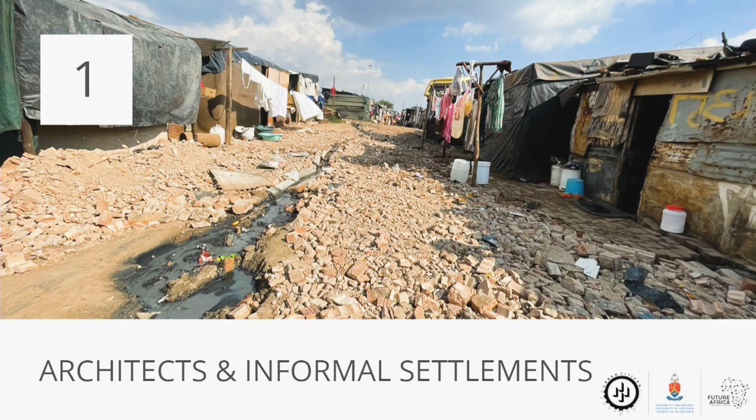Showing you what we've done, but I think it's really important for us to talk about how do we engage, how do we translate the work that we're doing as architects into tangible outcomes that could really lead to improved well-being for the inhabitants of the community. And I think that's really important for us because most of our work manifests in the built environment, but it's also something that's quite difficult to really implement in the end.

To contextualize it, I think we need to also state our approach or the way we see informal settlements, really.

I think for many, informal settlements are seen as a transitionary phase where we will move into a formal context, so we will one day develop our cities into being formalized altogether. But I think that's in many ways quite conflicting in terms of what we see currently.

We are very much aware of the high levels of informality. And ironically, this whole notion of the modern city, which is highly regulated and controlled and organized, both drives this informality, but then at the same time ignores it and says, well, by the way, you're not part of the formal process. We will not deal with this at all.

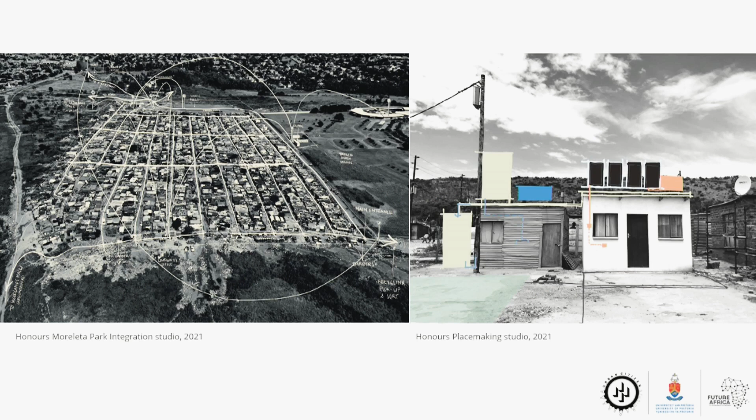I think it reminds us often of the fact that we are going to sit with this condition for a number of years and possibly forever, which means as professionals in the built environment, we need to start thinking about how do we actually engage with this and how do we actually work within these communities.

So at the Department of Architecture, but under the Unit for Urban Citizenship, we've actually been working in Melusi, Cemetery View, and Plastic View, and we'll be sharing some of our work here. And I will start with the work in Melusi.

I think we all know where they are. It's in Pretoria West. It's a rather new community. And we've had 2 studios there already: the Climate Change Adaptation Studio from 2020, and then the Placemaking and Placekeeping Studio this year.

I think to contextualize that, we've got a larger research project that looks at the interaction between the built environment and the users as a means of understanding the interaction between public health and the built environment.

And that's not necessarily new, but working in informal settlements is, I think, really important because for a long time that's really been ignored. In order for us to do that work, we're collaborating with the Department of Public Health and Chemical Engineering to understand both the built environment, but also ways to monitor certain indicators in the process. For the project, we are focusing specifically on heat stress and water insecurity.

And from that, we hope to develop a community resilience plan. So the thinking is that we will understand ultimately the exogenic and endogenic vulnerabilities of the users within Melusi, and importantly, the ground level conditions that they're experiencing.

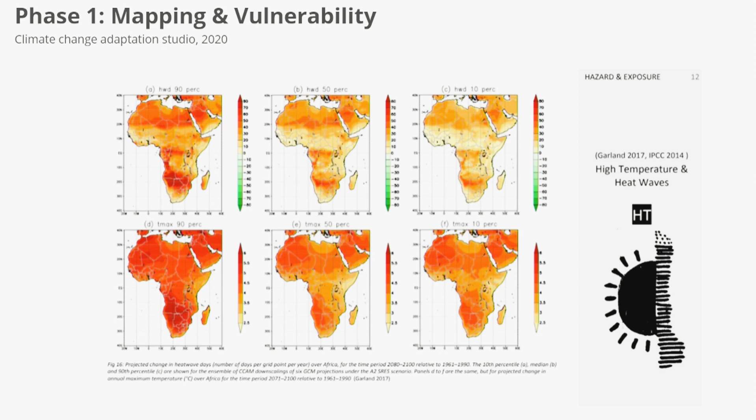In the first phase that we undertook in 2020, we looked at the vulnerabilities in Melusi, and we started translating that from what is available for South Africa and for Tshwane. So there's a lot of information available on the larger vulnerabilities, but what does it really mean when you're moving into a community itself? So we translated that into specific exposures that we are dealing with.

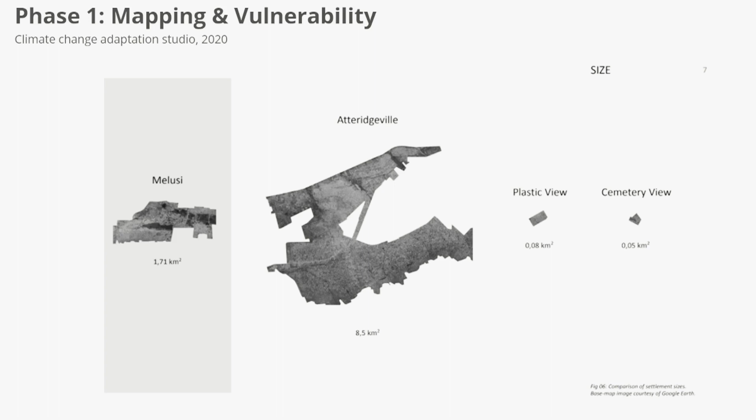Ultimately we've come to realize, I think we all know that, and we repeated it again, that informal settlements are very different. So again, when you start looking at a comparison between Melusi and Plastic View and Cemetery View, for instance, we start seeing that the conditions are different, and resultantly the exposures and vulnerabilities should also be different in the end. For instance, Melusi has a much lower density, which I think translates into a very different quality of life.

In the end, for the work, we started looking at the range of exposures, the range of sensitivities, and larger hazards, and identified infrastructure deficit, exposure to water insecurity, higher temperatures, and ultimately extreme weather events as being important factors to consider.

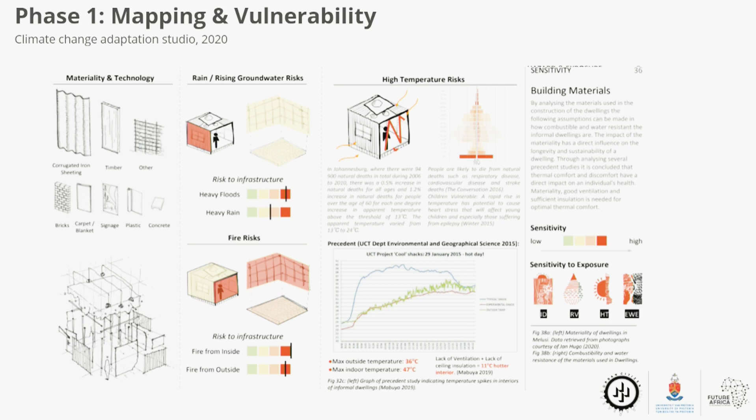But we didn't want to stop there. We wanted to translate it back into what it means in the built environment. So how does that translate into the typical house that you see in the end, and ultimately bringing that to the point where we say, what does it mean for the users?

Now, what you see here is a number of images that we started developing. And because we couldn't get access to the informal settlements in 2020 because of the lockdown, we used a process called cognitive dissociation, where we started asking the students to imagine what it would be if you're exposed to these different risks and hazards.

So identifying users, creating a story, and ultimately also looking for ways that you can create solutions that would actually be local and contextual within the context. So looking at a way to really understand the user in the end.

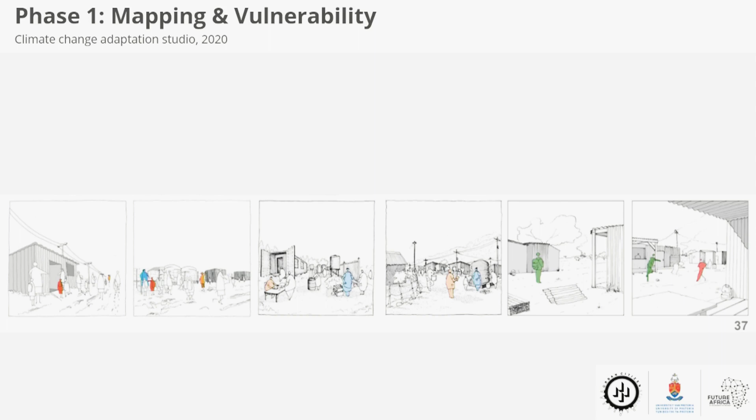In 2021, this year, we've been able to go to the site, which was actually really nice. So we used the ukuDoba method that's been developed by UP and Chalmers University as a means for us to start documenting small-scale GIS-based data, but also spaces that are generally not documented.

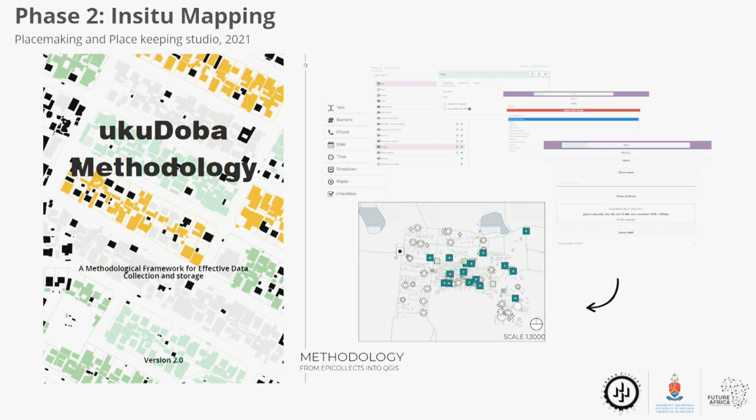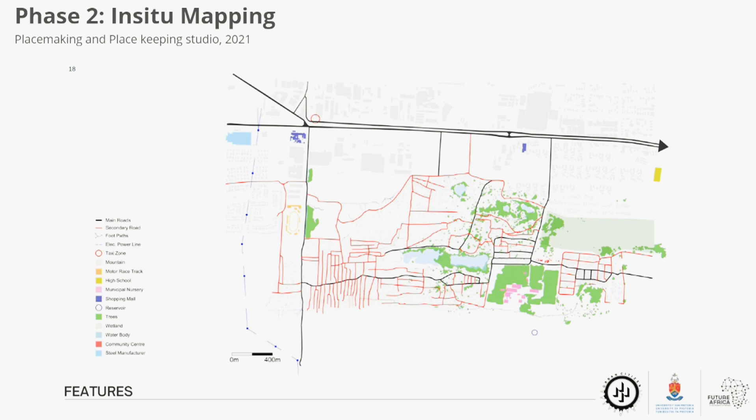And I think informal settlements are really one of those. So we started with OpenStreetMaps, using it as an open source platform where you can start documenting the informal settlement itself. So that's, I think, a good start already. And there, the geography department helped us a lot with a lot of the documentation.

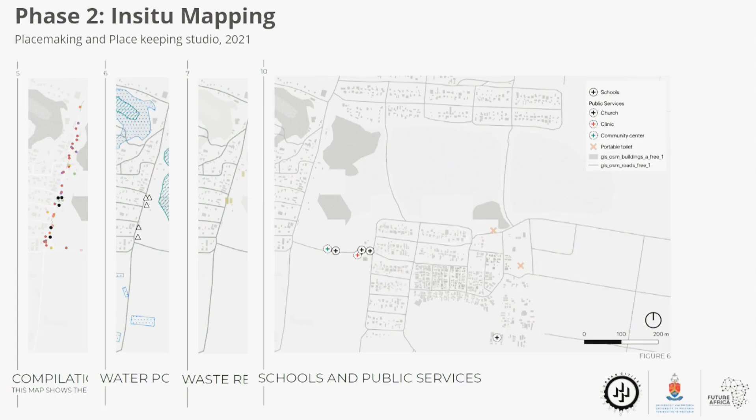But we didn't stop there. We moved on towards what happens in situ on ground level. So using geotagging, and as Marion noted, all the different resources that we've been able to document on site, the different important resource nodes, houses that have resources or not, waste that's accumulated in certain areas, and ultimately important services to the community and important businesses and so forth.

Now, the intention was here to start understanding the context itself and also understand the shared spaces in the process. Now, because we're architects, we don't like to stop there. I think that's really important, is looking for ways that we can start talking about the spatiality, the nature of the public space that is shared by the community.

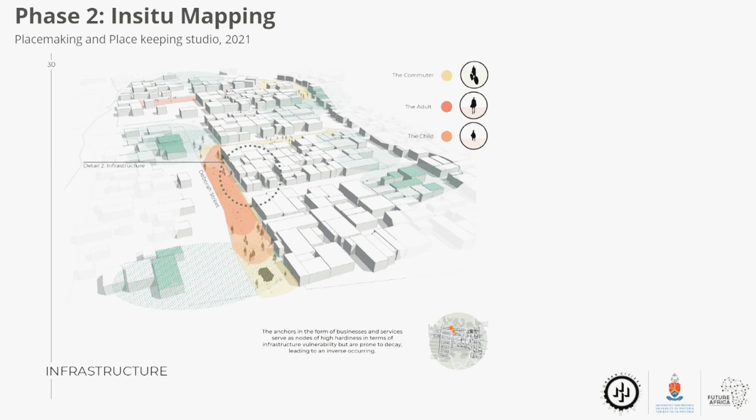And I think this is important in informal settlements because that's often not really available for anybody, which really is, and where I think you can make a massive impact in the end. So translating that to the lived experiences in the end and where that is located in the process. From there, we've started developing solutions.

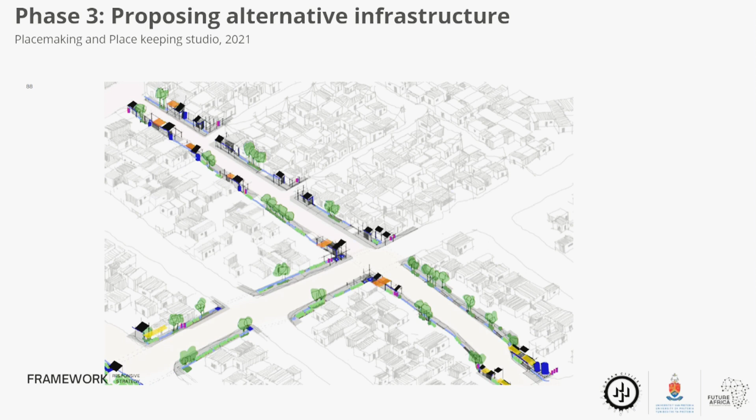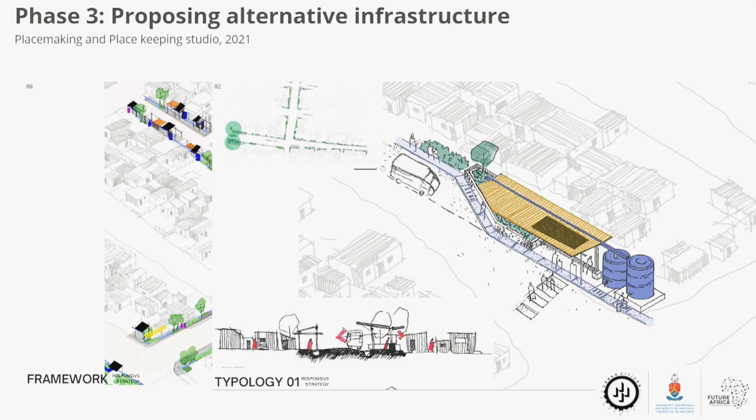Identifying the infrastructure needs that's needed. I think this is really often a response to the nature of the infrastructure upgrades that we often see, arguing that there are ways that we can actually improve well-being in the process. So identifying that it can be linked with the larger network of the community, and how the ways of service provision can ultimately also provide public goods in a sense. It can provide public space where we can engage, space where we'd like to spend time, rather than seeing it as a trajectory towards slow incremental growth of the informal settlement.

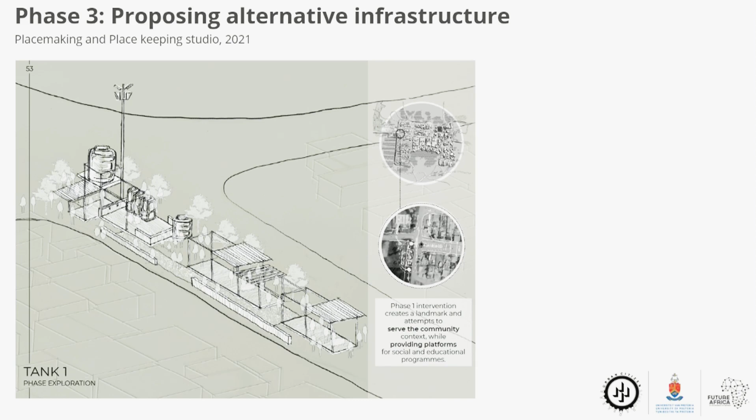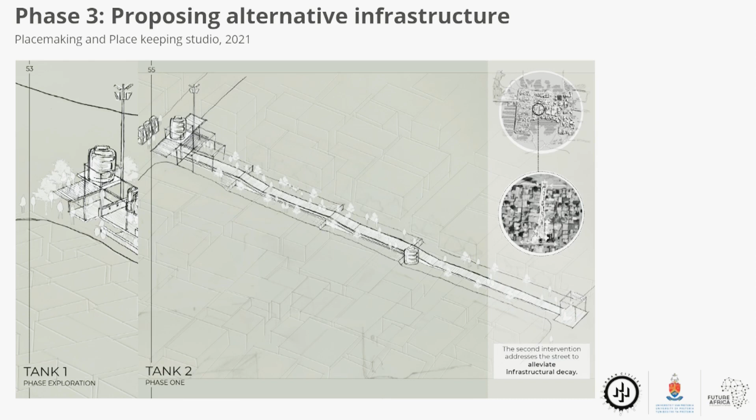And that has really translated into a number of proposals by the students, which address both the specifics of points within the site, but also starting to talk about how do we change streets as a whole. Can we do that? How do we do that? I think this is really our question ultimately - how do we translate these ideas into tangible outcomes in the process? There's a lot of ideas around what it can mean for the community, but how do we actually make it tangible?

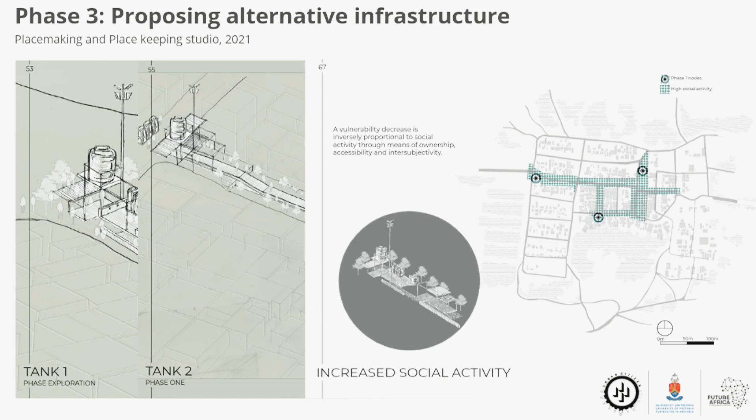For the project itself, the larger research project started by simply understanding the context we're working in, but now we're at the point where we'd like to understand the endogenic and exogenic risks that people are now exposed to, which meant we started the middle of this year collecting a number of water samples, developing sensors where we can start documenting the indoor environment, temperature, pollution, light qualities, and so forth.

This meant we observed a series of selected houses, but also developed infrastructure. That's my colleague Paul, who's developed a number of sensors that we can actually install in informal settlements or in houses without electricity, which is quite tricky. In the process, the students have been part of developing the sensors, installing the sensors, and documenting the information.

I think this is a great opportunity for them to also work within informal settlements, working from it both as architects working with space, but also from an academic scientific point of view, understanding the empirical data that we're collecting in the process. So this is where we're at, and hopefully over the next 2 years we'll be able to collect sufficient data for the work that will continue from there.

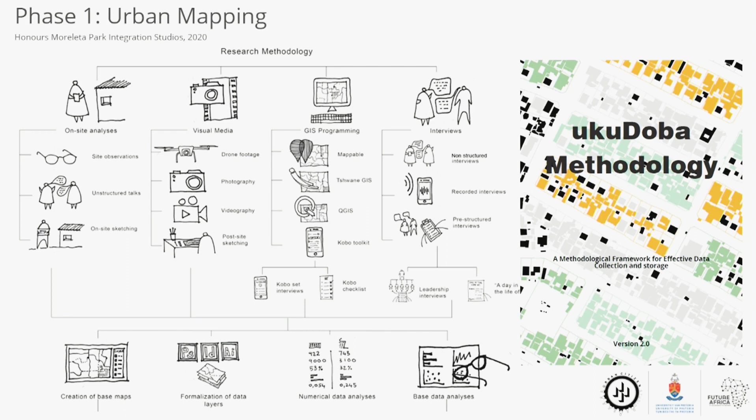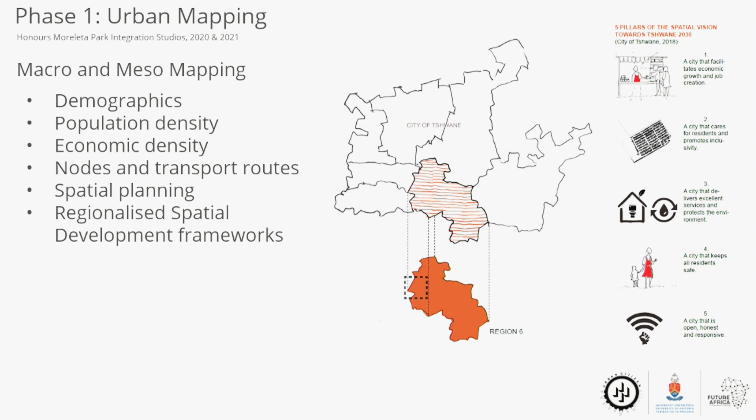Then in phase 1 of this project, we also used the Ukudoba methodology, same as the Mulisi studio, where we went to map the settlement through various different mapping sets. In phase 1, we looked at the macro and meso mapping, where we look at demographics, population density, economic density, transport nodes, spatial planning. I would have loved to show everything to you guys, but these are big maps with big data on them - really to look at the regional spatial development frameworks, to put us in a position to understand how we can assist local government within the upgrade of these informal settlements.

As you would see here, one of the data sets we've collected is the history of Plastic View. We did the same with Cemetery View, to see how the settlements have grown, densified, and changed. From 2008 to 2021, we can really see the changes that happened. To give some context, in 2008 to 2009, you'll see a big difference - before that, the settlement was spread out, and then the lawsuits between City of Tshwane and Lawyers for Human Rights happened, and Plastic View or Woodlane Village was formed, in the structure that you see from 2009.

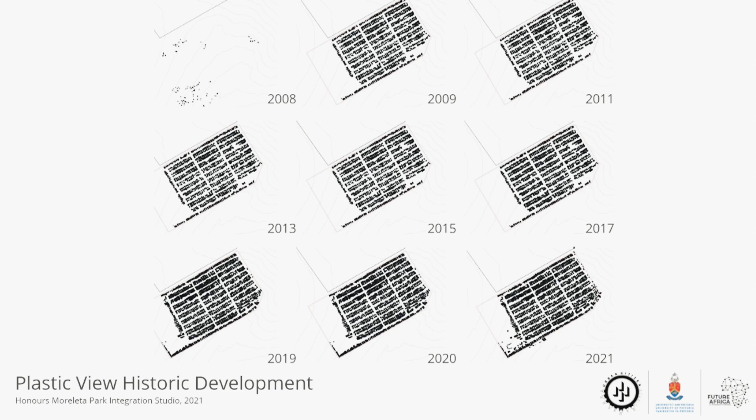So you can clearly see how Plastic View has densified. This links to what Marion said, this is the data they can truly use to see the changes, the growth in the settlements, and you'll probably recall this from the previous presentation as well.

It's great to see that this data gets used. We were able to put this data in place to see how many units there are. Plastic View has 922 units with a population of 8,000 to 9,000 people, broken down into 341 single-family homes and 489 multi-family homes, which is significant, with up to 12 people per home, and then 92 enterprise units, which can be broken down into various enterprises.

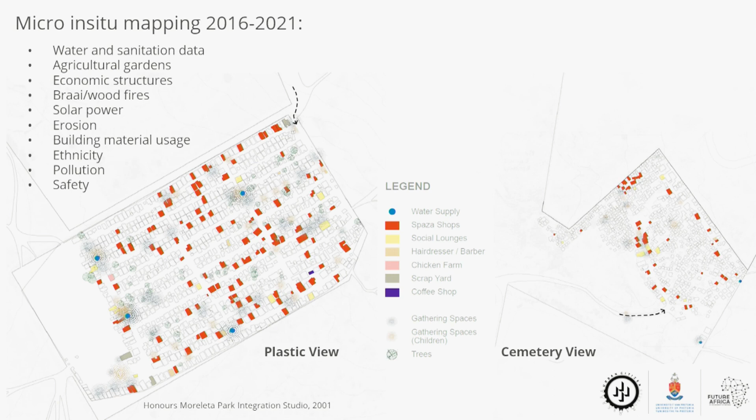Looking into the feeling of the community and going into the mapping, using the ukuDoba methodology to map and geolocate each of these, we look at aspects like water supply, spaza shops, social lounges, hairdressers, chicken farms, scrapyards, and coffee shops - there's even coffee shops, I had the nicest coffee there. So really, to understand what the community is about.

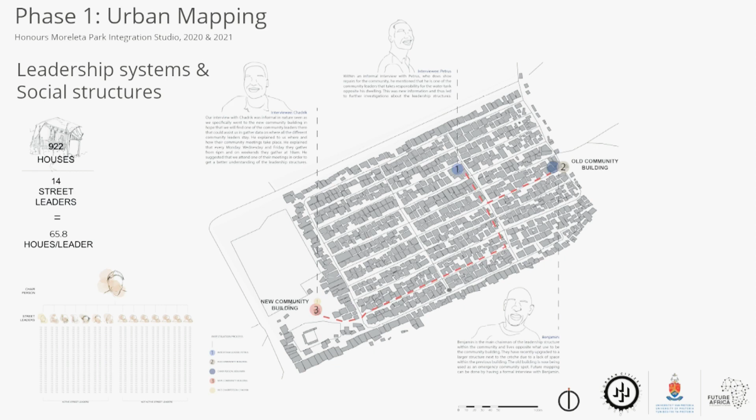One of the most important things is to really start understanding the community itself, the social networks - something that came out in the previous presentation as well - and to understand the leadership structure. Plastic View has a very strong leadership structure, and some of the Cemetery View leaders are also here, who are also community health workers. We're really starting to understand how these structures work, how the settlement operates, and their daily routines and lives.

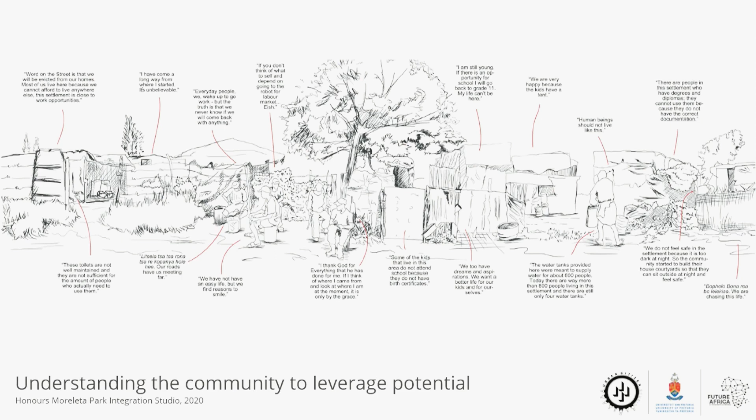If we take that further - you probably won't be able to read any of the text there - but we start pulling out the stories from community members: their backgrounds, their skills, their ambitions, really starting to understand what these settlements are about, so that we can start leveraging the potential that is there, because there's real potential within these communities and within the people.

Taking that further and translating it into social potential, where we can truly use the skills that are there, or the community and social structures that are there, to really start improving these settlements and help them improve themselves.

Phase 2 of our project is community action planning, which we call CAP, where we truly go into the community. You'll see some of the students working with the community, finding out what their problems are, what their issues are, and what they want and their ambitions, so we can understand.

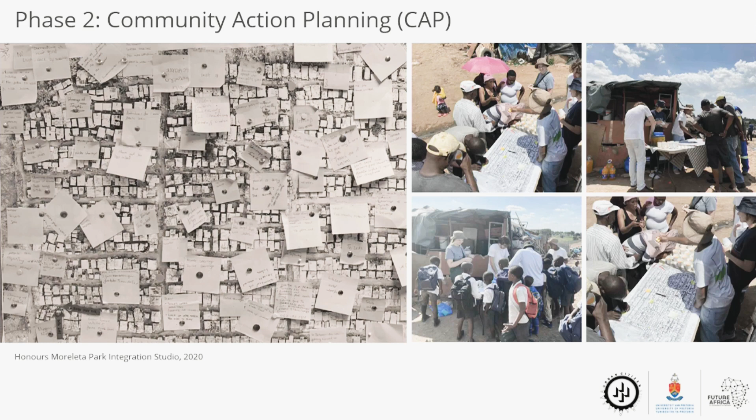So we don't put down a toilet that isn't what they want, or they want a toilet but we don't provide it. Truly understanding the needs of the community so we can supply toward that, or work with stakeholders to get it sorted. Through these community action planning processes, we were able to work with COPC, Dr. Eleanor May and her team, and provide for some of these things through those structures. We don't provide them ourselves, but we connect and try to assist in that way.

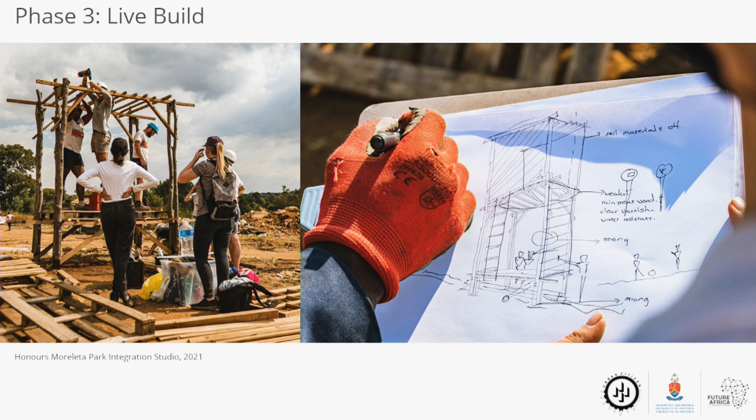Something really interesting and fun this year was that the honors group and the masters group worked very well together in a live build process. We built on the 2020 community action plans and took that further into a live build process, trying to work with the community, design with them, and see how they build their structures and put that together. They actually put up a structure to test building methods.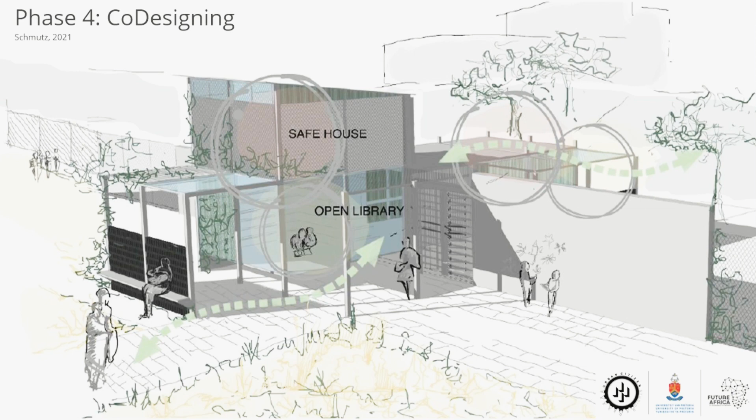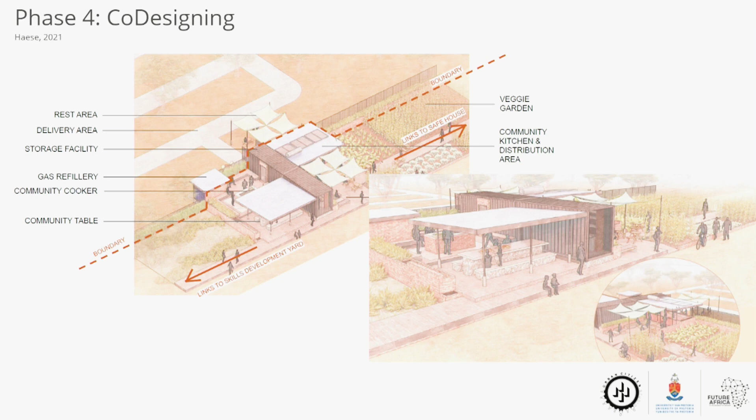This is a project by Ms. Schmutz, where she worked with the community to really see what they lack and need: a safe house, open libraries, congregation spaces. The next project is from Ms. Haese, where she worked with the community to try and connect the church to the community and vice versa, to see how we can provide multiple solutions to their problems and envision a settlement upgrade that truly caters to their needs.

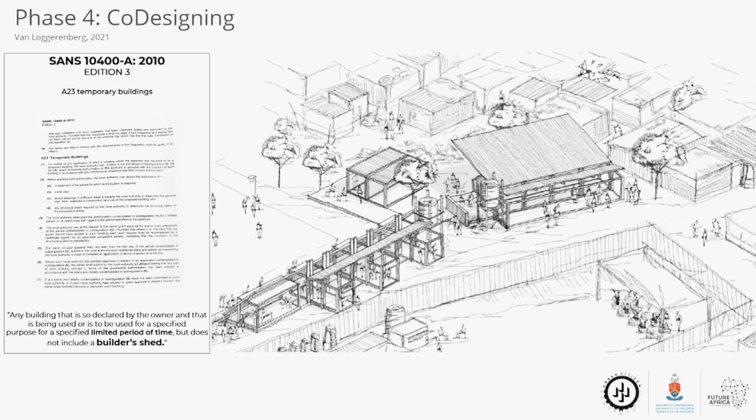The next project is from Ms. van Loggerenberg, where she investigated the SANS regulations, SANS 10400, the building regulations, to see how we can work in these settlements and work towards an upgrade within the bylaws and requirements, working with temporary versus non-temporary structures. We have a very interesting situation with Plastic View, where there are court orders against it. So how can we truly invest in these settlements, even with court orders going on, so we can leverage these informal settlements toward an upgrade?

Which brings us to the in situ upgrade of these informal settlements. The upgrading of informal settlements is framed within the UISP, and the UISP strongly requires in situ upgrading of informal settlements, and only as a last resort does it state that relocation is okay. We are often of the opinion that architecture is uniquely positioned to assist within the in situ upgrading of informal settlements and facilitate processes of community engagement and participation.

The late Mr. Patrick Magebhula Hundsley said, 'The kind of upgrade we speak of is not about land and services alone. This is about realizing real citizenship and equality in our cities.' We also look at the Laufen Manifesto for Humane Design Culture: we must produce spaces that counter exploitation, control and alienation, whether in urban or rural landscapes. With all our expertise, creativity, and power, we need to contribute more dynamically and consequentially to the global quest for equality.

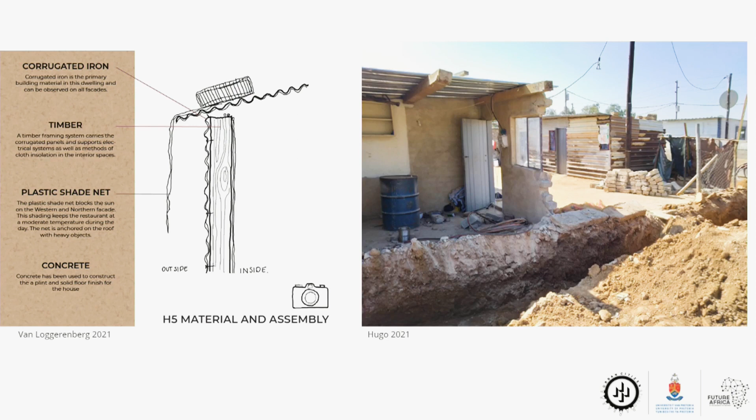This brings us to the contribution from our side to interdisciplinary and transdisciplinary approaches. Through our engagement with these various informal settlements and their participation, we can start leveraging our skills within climate adaptation, social justice, social empowerment, and community empowerment, truly working together and collaborating with transdisciplinary skills to realize communities that assist towards the sustainable livelihoods of communities and community members.

Through the building of strong networks of engagement with communities and various stakeholders, the opportunity exists for various disciplines to interact and participate in co-research and co-design, which we're trying to already do with COPC, and we're trying to continue that, and we are open to further collaboration with more departments and more disciplines.

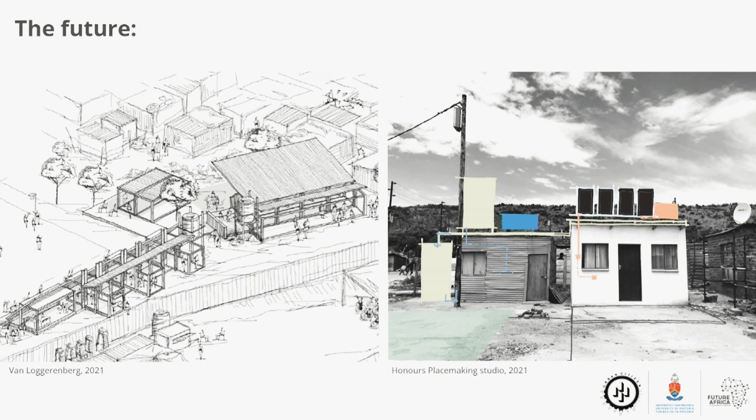So this brings us to the question: how can we collaborate? How do we collaborate and leverage our capacity and skills to achieve real improvements in these communities toward reaching the Sustainable Development Goals? So I'm going to leave it off with: how can we collaborate? There we go. Thank you so much.